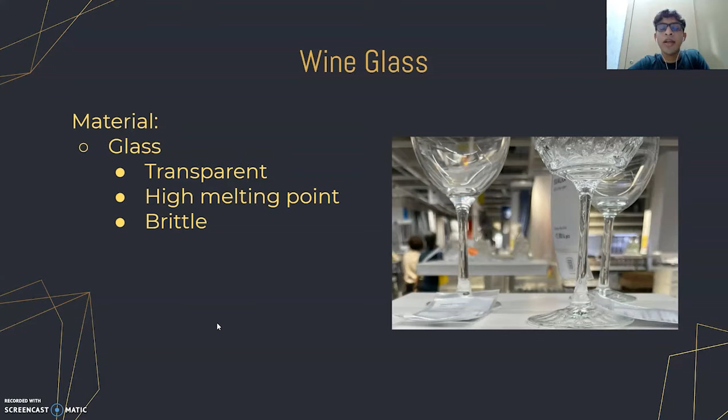Wine glass is made of glass. Glass is transparent, allowing the user to see the wine being served. It has a high melting point, which means the wine glass can be used in a dishwasher, and it is brittle.

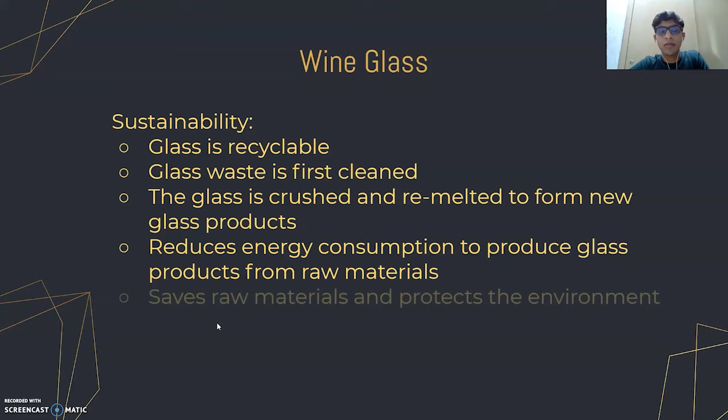Glass is recyclable. Glass waste is first purified and cleaned of contamination. It is then crushed and remelted. This glass is called a cullet. The cullet is then used to produce new products. The usage of glass cullet saves raw materials and the environment.

Good morning, everyone. The item I'll be talking about will be the non-stick pan. Firstly, its function, which is to heat up and cook food.

The feel of it: it has a smooth handle, surface, and sides. The bottom is rigid, and the pan is lightweight and sturdy. The visual: it has a shiny silver rim, black surface and sides, silver base with circular ridges, and a black handle.

The first material will be aluminum. Its properties are great conductor of heat. This allows the pan to heat up quickly and evenly, about 16 times faster than stainless steel and about 3 times faster than cast iron. Lightweight - this allows for easy handling, so you can move the pan around without much trouble when cooking. It has a high melting point, so the pan can withstand high heat from the stove without melting or deforming.

To the sustainability part: aluminum is recyclable. It can be melted and used for other purposes, such as casting to make new products. It is also more efficient to recycle than to produce new aluminum, because melting and recycling aluminum uses a lot less energy than extracting fresh new aluminum from aluminum ore.

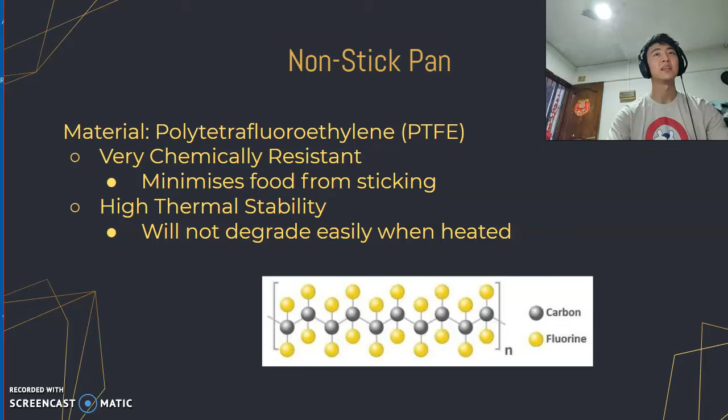Now to the third material, which is phenolic plastic. It has a low thermal conductivity, which helps to significantly reduce conduction of heat from the pan to the handle, so it remains cool in use. This enables the user to hold the pan by its handle and move it around without being burned.

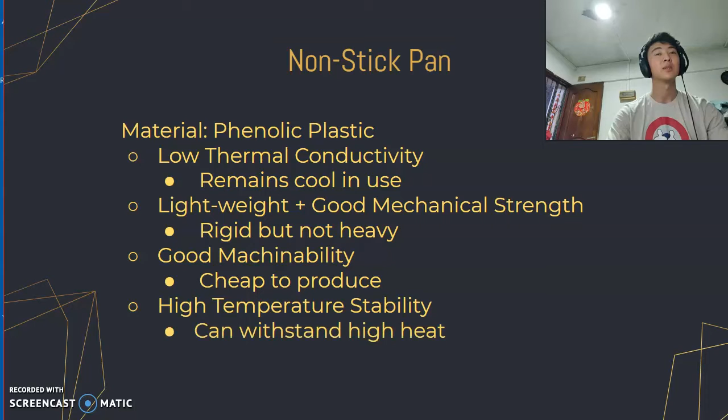Next, it is lightweight and has good mechanical strength. This allows the handle to be rigid while not adding a lot of weight to the pan. Good machinability - this reduces the cost of manufacturing the pan, providing cheaper pans. It also has a high temperature stability, which allows the handle to withstand high heat from the pan without any degradation of the handle.

The sustainability for both plastics are very similar. They are recyclable, but it is difficult to do so. Firstly, for the PTFE, heating it to a high temperature above 350 degrees Celsius causes it to decompose to form very harmful products such as fluorocarbons and hydrogen fluoride, which can damage health and the environment.

Thus, it is commonly recycled by being pulverized. However, 3M has started a new recycling plant that converts PTFE into its gaseous monomers, which are fed back into the manufacture of new materials. As for phenolic plastic, it is also recycled by being pulverized and added into manufacture of new phenolic plastic or other plastics. Now I'll be handing my time to Cher to share about the pillow.

Hi, my name is Cher, and today I'll be introducing the pillow we found in IKEA. The pillow is built in a way to fit the unique shape and curves in one's neck to keep it in alignment during sleep. It provides comfort for the head and neck during sleep. The pillow has a smooth and soft texture to it. The pillow cover is made out of a white background with abstract black lines.

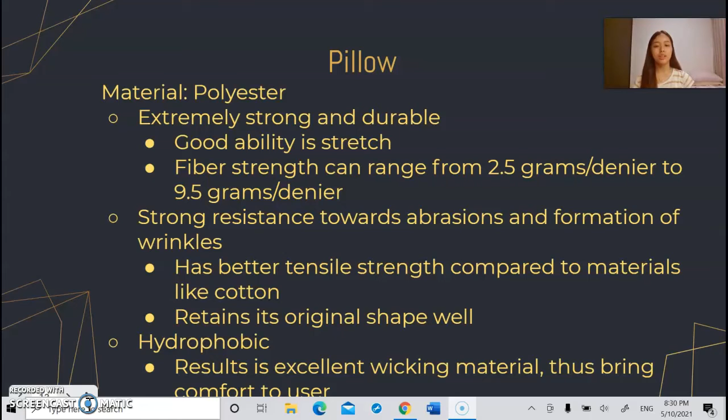I will now begin talking about the material of the pillow. The pillow is made out of polyester, which is extremely strong and durable, and it has good ability to stretch. It has fiber strength, which can range from 2.5 grams per denier to 9.5 grams per denier. It also has strong resistance towards abrasion and formation of wrinkles. It has better tensile strength compared to material like cotton, and it is able to retain its shape well. It is also hydrophobic, which results in a good wicking material, thus bringing comfort to the user.

Now, I'll be sharing more about polyester and its sustainability.

Polyester is a synthetic material and is one of the most commonly used thermoplastics. It's used in applications including consumer goods, packaging, industrial goods, and textiles. The filling of the pillow is made out of polyester hollow fiber that's 100% recycled.

To attain 100% recycled polyester hollow fibers, plastic bottles have to be sterilized and crushed. It is then spun into strings of yarn which can be transformed into a fiber and then blended into a fabric, also known as recycled polyester.

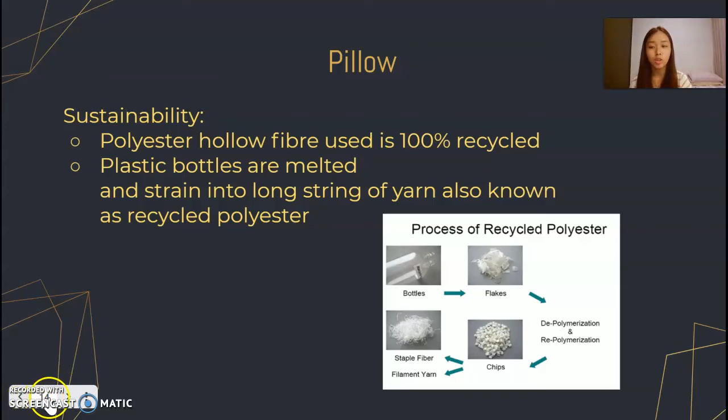Now, I'll be passing my time over to Aqeef. Hi, my name is Aqeef, and today I'll be sharing more about the coaster.

The function of the coaster is to protect the top surface of the table from getting burned due to high temperatures of the heated pan or pot. It also reduces noise from glasses and mugs. As for the feel of the coaster, it is hard, rough, and lightweight. Moving on to the visual, it is opaque and not shiny.

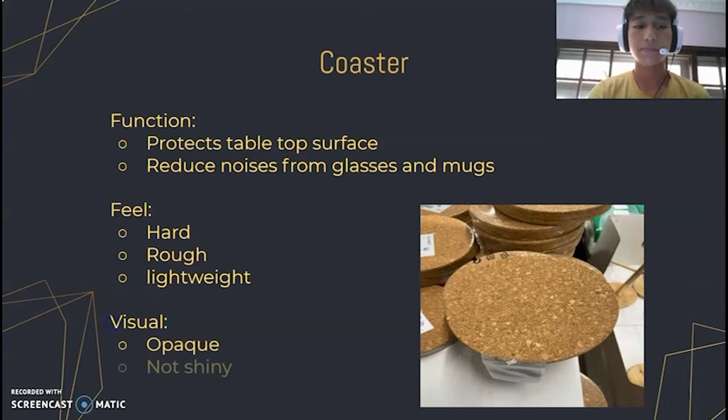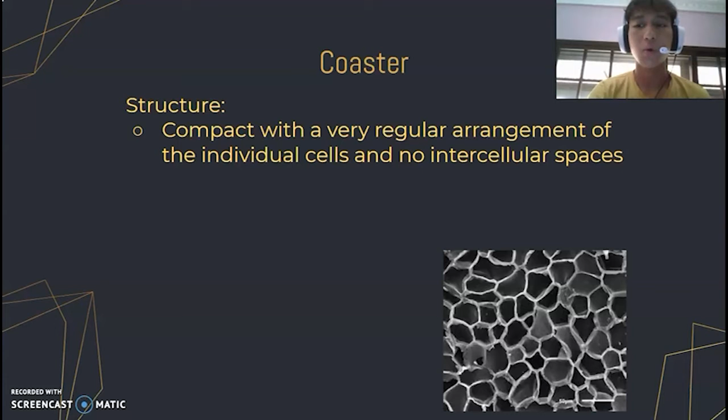Now, I'll be discussing more about the structure of the coaster. Its structure is compact with a very regular arrangement of individual cells. It has no intercellular space, and cells are generally hexagonal prisms, stacked in radial rows from base to base. The rows are parallel to one another and often staggered.

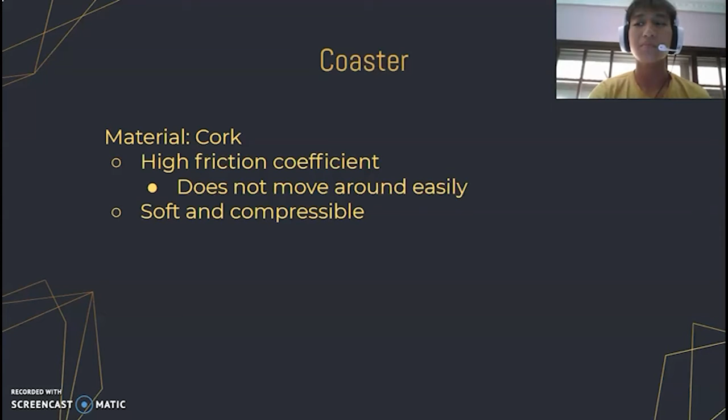Moving on to the material of the coaster, it is made out of cork, and its properties complement its functions. First off, cork has a high friction coefficient, which helps it to not move around easily. Its second property is that it is soft and compressible, so the coaster does not scratch the surface of the table, and it's able to absorb vibrations, which helps the liquid inside the mug to not splash easily when the table is hit slightly.

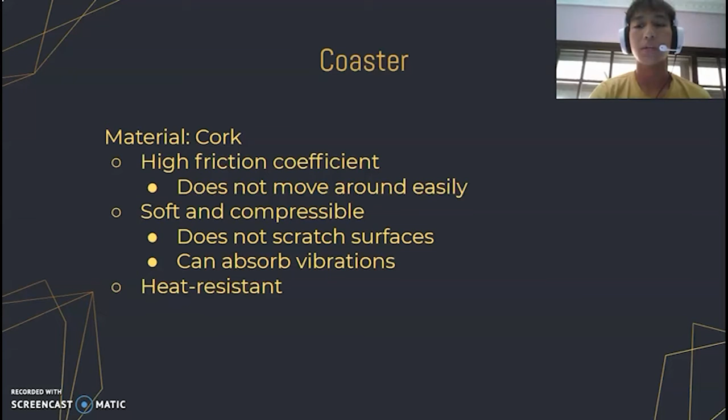Furthermore, the structure of the cork and its flexibility makes it possible to simultaneously suppress impact sound and eliminate sound bridge areas. Lastly, cork is heat resistant as it is able to withstand temperatures from negative 80 degrees Celsius to 140 degrees Celsius. A coaster is sustainable as it is recyclable.

There are several recycling centers. However, these centers only recycle natural cork and do not recycle synthetic cork. The difference between these two is that synthetic cork is smooth and rubbery, while natural cork is rough and hard. These companies recycle the natural pulp by shredding and grinding them into smaller pieces which will be used as fillers for shoe production, bag manufacturing, and other products.

Now, I will be passing the time over to my friend Prans, who will be sharing more about the next item. Thank you. Hello, my name is Prasansa, and I will be sharing about the porcelain mug.

The porcelain mug is often used to hold hot liquids and drinks such as coffee and tea. It feels hard, sturdy, smooth, and heavy. Moving on to the visual, it has a glazed and shiny surface. I will now be moving on to the material and properties of the mug. The mug is made out of feldspar porcelain.

It has high temperature resistance, which means that it is able to handle extremely hot liquids such as coffee or tea. It is also microwave and dishwasher safe. The feldspar porcelain is also durable and does not rot easily, so it can be used for a long time. It is also chemically inert, which means that it will not react with chemicals present in dishwasher soap.

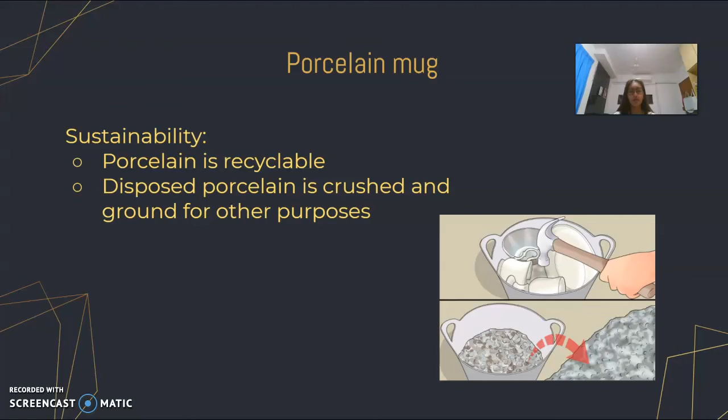I will now be moving on to the steamer. The steamer is often used to steam vegetables, fish, chicken, and dumplings. It feels hard and lightweight and is opaque. The next segment of the steamer will be explained by my friend Aqeef.

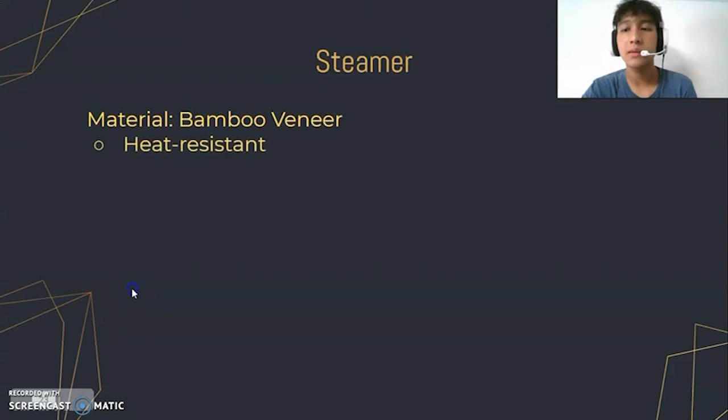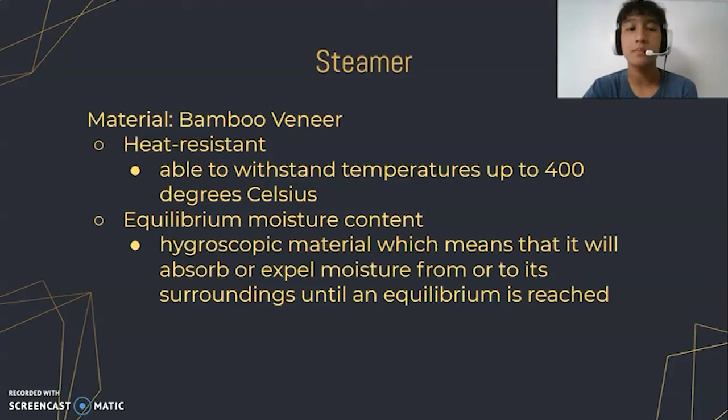Thank you, Prans. Now I'll be sharing more on the material bamboo veneer. Bamboo is heat resistant as it is able to withstand temperatures up to 400 degrees Celsius, which is perfect for cooking. Another property is that bamboo has an equilibrium moisture content as it is hygroscopic, which means that it will absorb or expel moisture from or to its surroundings until an equilibrium is reached. Hence, it is unable to get wet or dry.

Moving on to its sustainability. Bamboo is sustainable as it is biodegradable. Hence, it can be composted. Composting involves the creation of an ideal balance of oxygen, moisture, and heat to break down organic material, such as bamboo. Moreover, composting produces nutrient-rich soil.

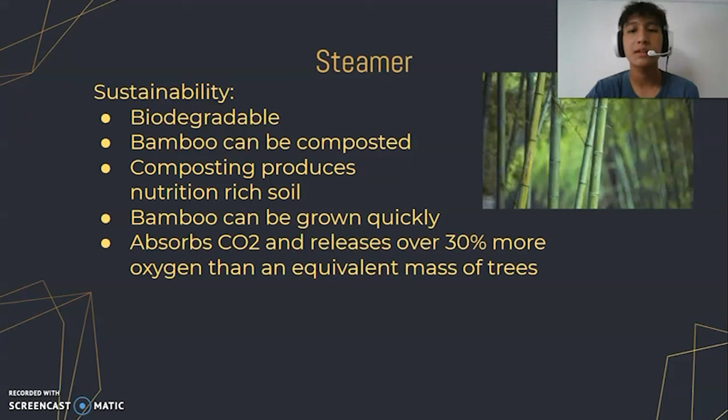A second reason is that it can be grown quickly, as bamboo can reach its full maturity in 1 to 5 years. Furthermore, bamboo purifies the air. It is able to absorb carbon dioxide and release over 30% more oxygen into the atmosphere compared to an equivalent mass of trees. With that, we have come to the end of our presentation.